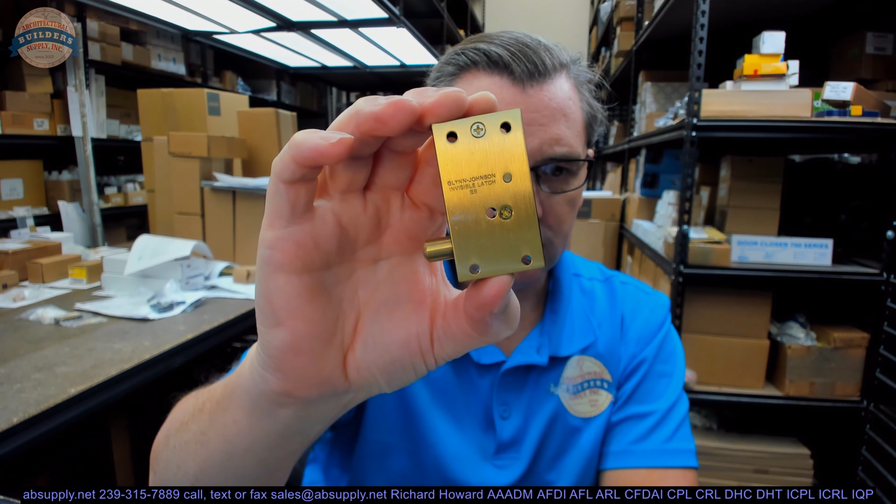This video is to bring you a closer look at the IVES CL12 in a US4, and here it is. So this is what's called a touch latch. The CL12 is the larger of two touch latches that IVES currently manufactures. There's the CL12, which is also known as, you see on there, it says Glynn-Johnson Invisible Latch BB. BB stands for large.

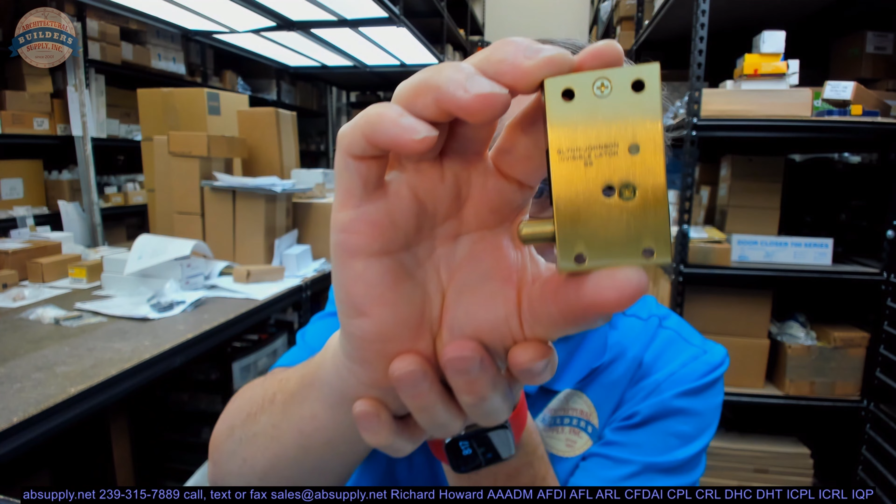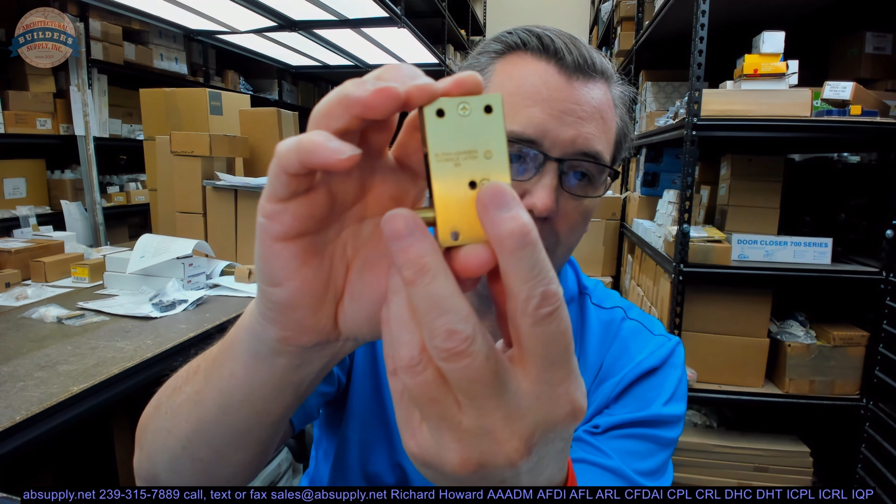Before these were marketed under the IVES name, 30 years ago, they were marketed as the Glynn-Johnson touch latch, and it was the BB large. The CL11 is the other IVES touch latch, CL11, CL12. CL11 is the smaller one. That would say on it Glynn-Johnson Invisible Latch. AA was the small.

Shifting these under the IVES name must just be for marketing. IVES is the accessory manufacturer under the Allegion umbrella, with sister companies Glynn-Johnson, Schlage, LCN, Von Duprin. That's how it's marketed. So this is the CL12. Along with the CL12 and the CL11 is the CL14, which is an auxiliary pusher, which gives you more spring tension when you're dealing with doors that are heavier.

So this latch is going to be used, obviously, when you want to have a moderate-sized door where you have invisible control over it, where you can push on that door and it will latch, and then push on it again and it will release. People have used these on everything from medicine cabinets, even though this is probably a little large for a medicine cabinet, I'd probably use the smaller one, all the way up. I've seen them installed on doors that were 3 foot by 8 foot tall, and remarkably they worked. There's no published weight rating for the door on this item.

I've even recently sold this to someone who was using it in a drawer application. Literally a drawer. They wanted to push on the drawer and have a touch latch govern its operation. And I thought that was an ingenious way to do a drawer. I followed up with the client and I didn't get a response. I was curious to know how well it worked out for them. I imagine that it did.

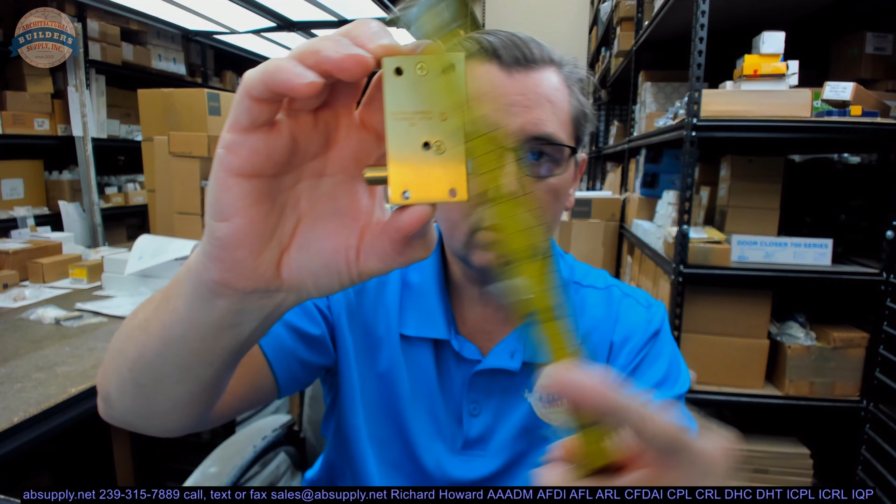Overall height of the body, about 2 1/4. Overall width of the body, about 1 1/4 inches. Thickness of this body is about 9/16. Then it will come with a strike plate. That overall height is 1 3/4 inches by about 11/16. Projection of the strike, not that that matters, but just for scope, looks like it's about 9/16. That's going to be installed, obviously, onto the door itself.

You're going to get fasteners. You're going to get, let's see here now, 4 for the body. Then you'll get 2 shorter ones for the strike. The other thing that's in the package will be this installation template, this piece of stamped wipe coat galvanized steel that you're going to need to use when installing it, and the instructions will show you why. Speaking of the instructions, let's switch to the screen view and take a look at all the supporting information.

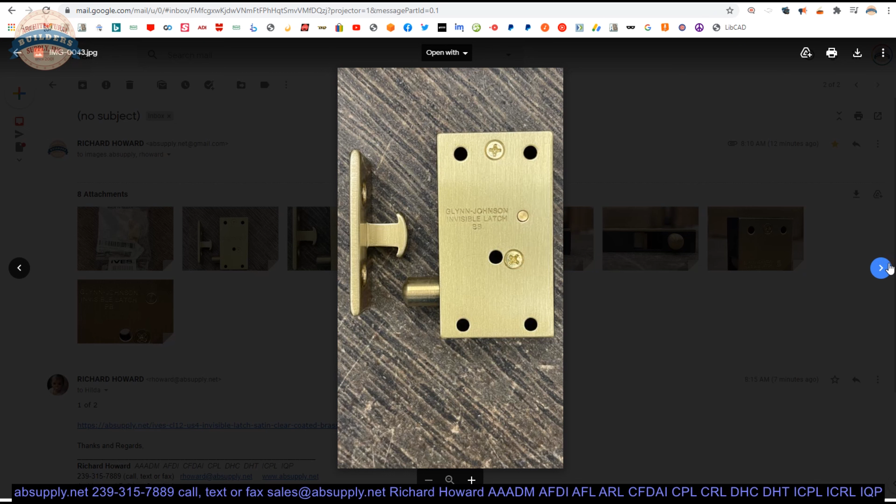Here is the item that we are looking at, and let's take a look at some photographs that we have first. Here they are. That's the packaging. All the contents. The body and the strike. The body. Side view, or an end view, I should say. That's what the door sees. Isometric type view.

A close-up of what's stamped on the faceplate. I've had customers call and give me that information. Then there's also the backside, that's just plastic, the plastic body itself. The strike, cast brass.

Screws, not in an exact US4 finish, but complementary. And then your installation template. Okay, so let's now look at the extended description information. Actually, first, let's look at the other finishes. US10 satin bronze, 26D satin chrome, polished brass US3, US4 satin brass. So I had it right. Those were the 4 finishes.

Now, extended description information. They talk about the fact that it's an invisible latch, dimensional properties. Invisible latch, ideal for installation where no visible latch is desired. Unit can be installed at the top, bottom, or side of the door. Can be mortised into the stop or surface mounted on the stop.

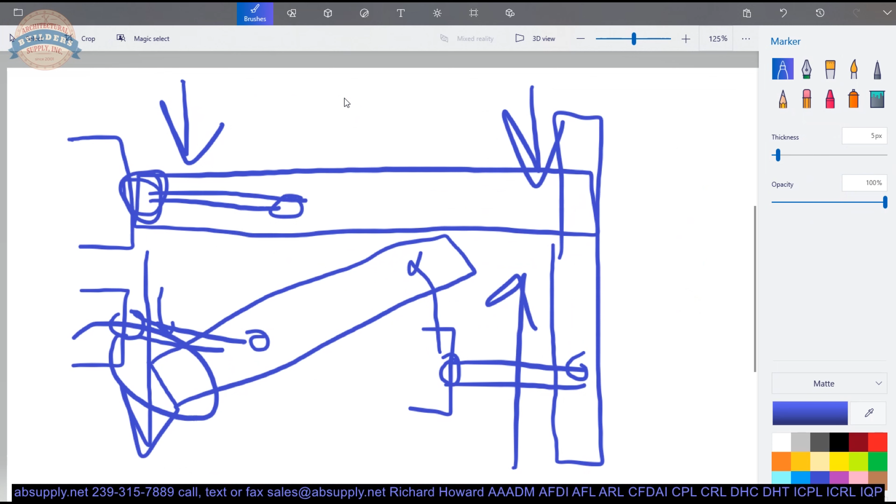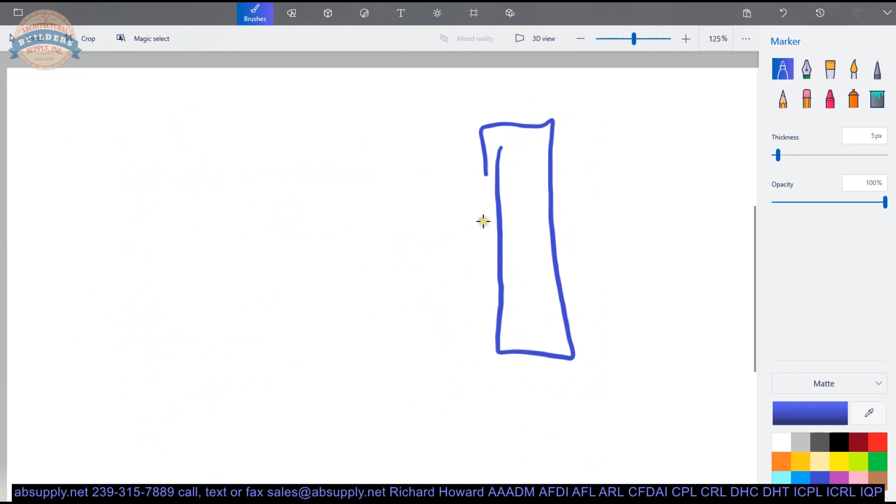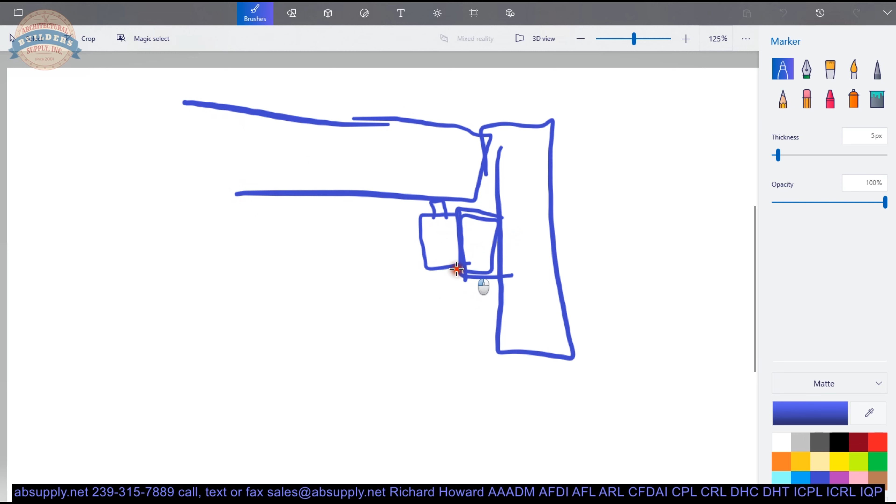That's not an awful idea to... sorry. If you have a frame, you have a stop, and here's your door, you'd be applying that right here. Okay, mortising it would allow you to move that down into this area here, obviously, into your stop. So you might want to consider not having it hang off into the opening any more than necessary.

Recommended for use on larger panels or regular size doors. And like I said, I've seen this installed on 3080 doors. Operation is simple. Latching is accomplished by a slight push. To unlatch the door, a harder push releases the door and pushes the door out. Brass and plastic construction, requires, I would say, 27 pounds to open the door. Brass, satin brass with a clear coat.

Okay, now with the item itself will come installation instructions. The installation instructions that are actually with this unit that I've received, the year is 2020. That's important to know because the instructions that I've received are the Glynn-Johnson instructions from 1999, not the more current 2003 installation instructions. I have them both linked to here, because I find when I review them, I see some different information provided on them.

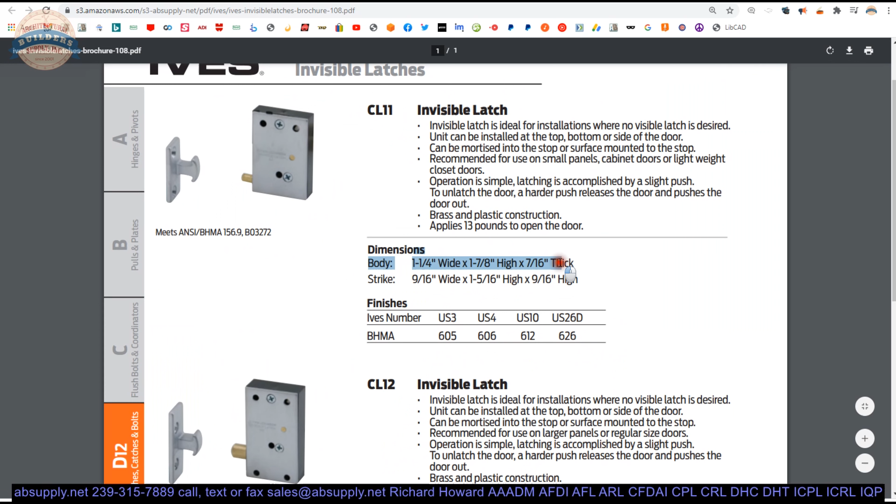First, the product brochure. Let's take a look at the CL12 and its sister products I had mentioned. The smaller version, with its dimensions here, about half of the amount of force required to open the door. The CL12, and then the CL14 is here. Adds an additional 10 pounds of force.

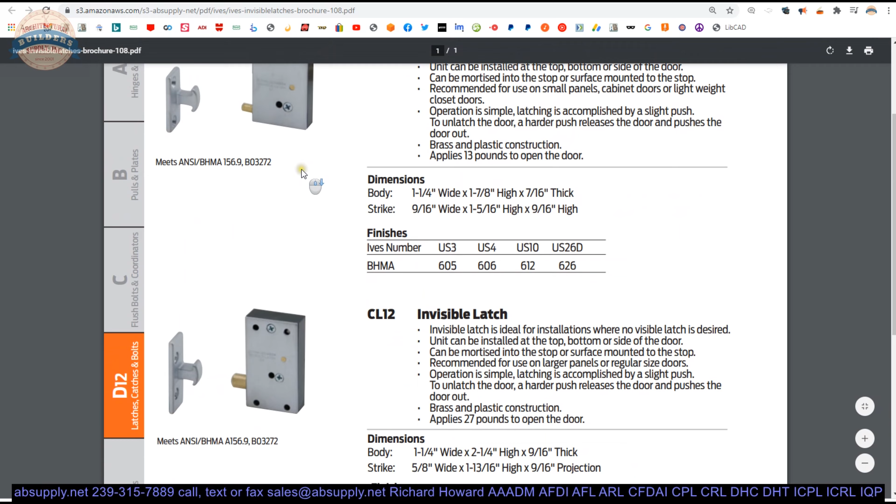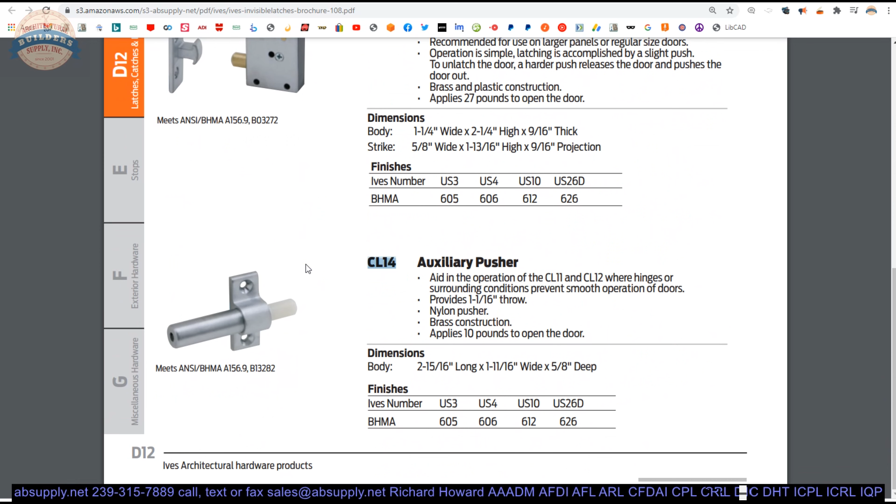And really what you want to have is an adequate amount of pressure against the face of the door so that when you push the door in, the pusher or the spring power inside of the latch itself is adequate to not only allow the door to be pushed away from the latch, but also the internal components to operate correctly. If you are not pushing in and then the latch pushing you back out, the internal components won't articulate the way that they're supposed to work in order to free the latch.

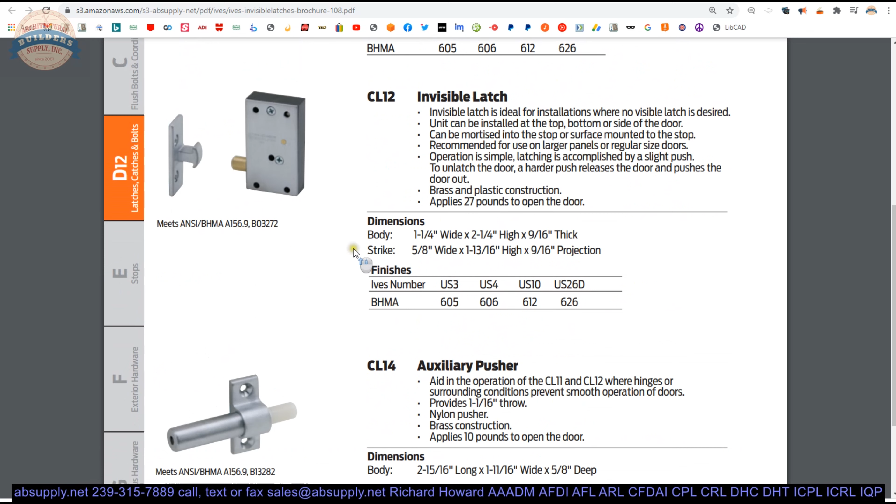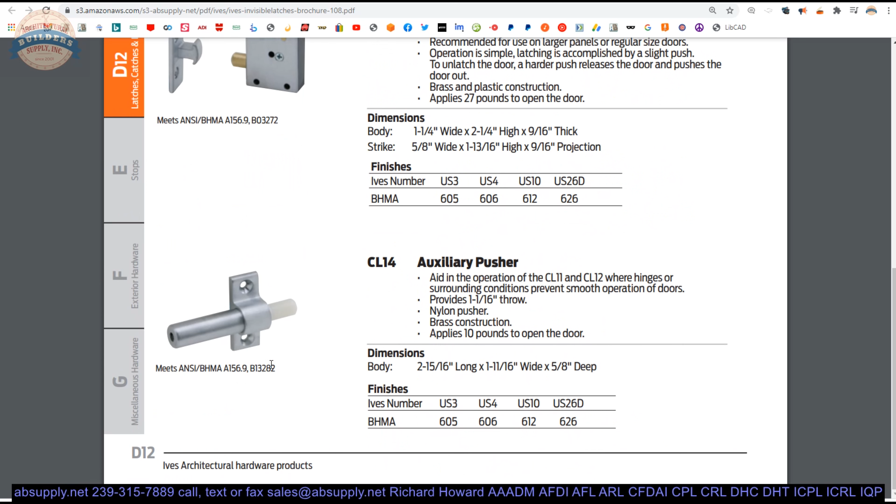There's a catch in here that opens up in order to allow that portion of the strike to exit the body. So you might find that you have sloppy or inconsistent or poor operation, especially when you are working with heavier doors. That would be an indication to add the additional pushing outward, because you can't control how much force is coming back at you. You can only control how hard you're pushing away from you, and you need to have that pressure pushing away from you.

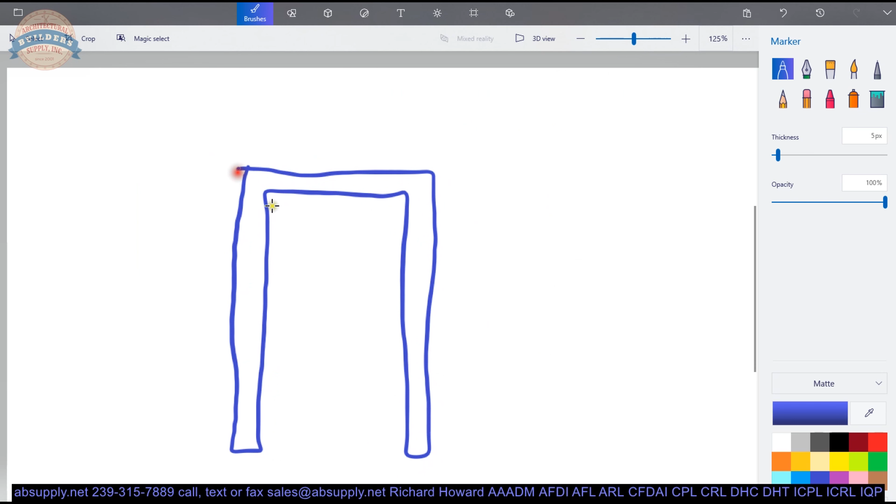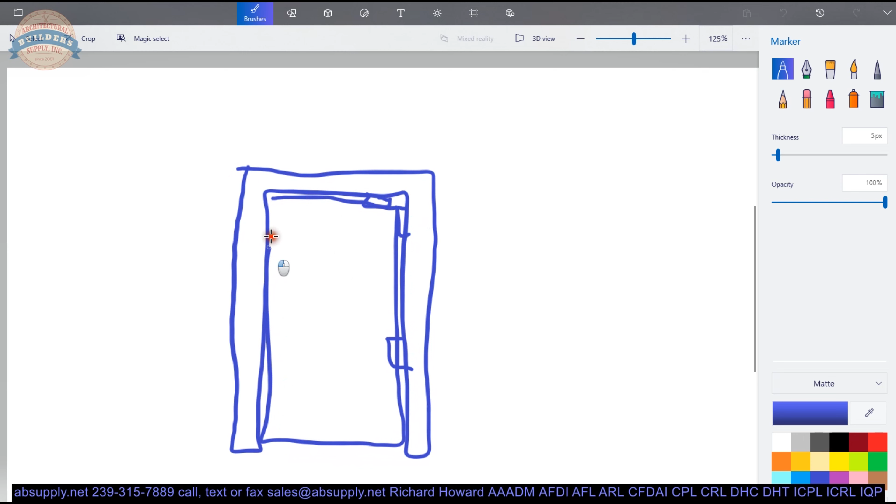The other time that I find people have trouble is when they have an extremely tall door, like that 3080 door that I had mentioned. It wasn't mounted here or here. It was mounted right where you were pushing. If you take your 3080 door and you install that up in this area and you're pushing here, I would expect that you're going to have trouble with this because of the amount of flex in the door. You're pushing here, okay? That's going to move.

I would say that entire door is going to actually move like that a little bit, in a very exaggerated sense. You're pushing here, but that may not affect the same rate of movement up at the top of the door. So if you move this a 1/16 of an inch, this may not move exactly the same amount, and it might render the operation of the latch a little sloppy.

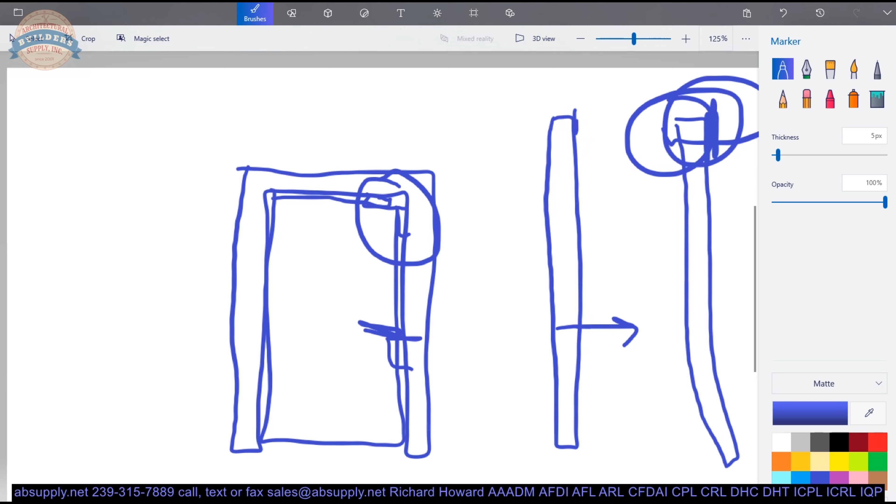So if you were going to be installing it in that type of area, you might need to consider strategically placing an auxiliary pusher, you know, to compensate. Experimentation is the key word there.

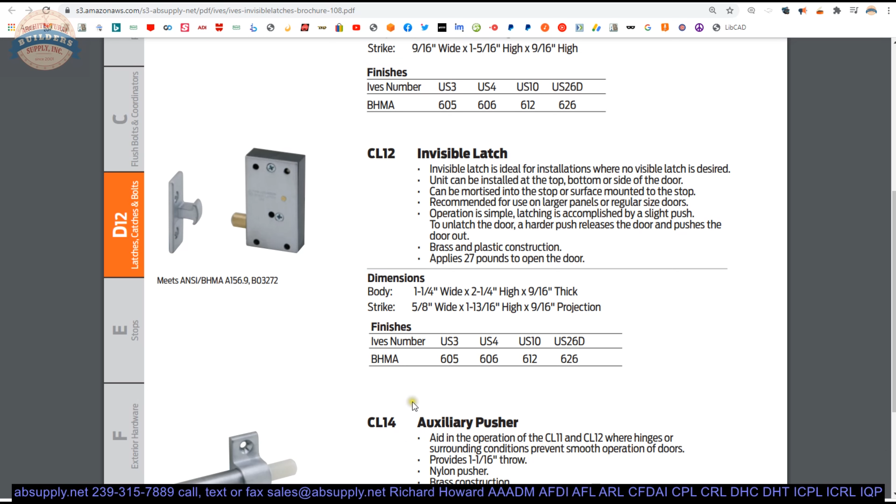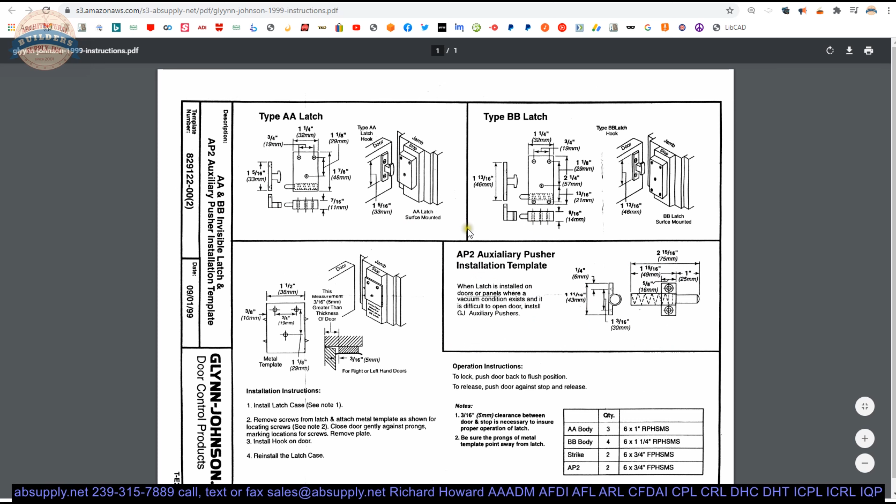Now, those installation instructions, let's look at the ones that come with the unit first, and we'll just go over them. When we take this document, we can immediately ignore the AA portion. We can ignore what Glynn-Johnson used to call the AP2, which we now call the CL14. Ignore that. So we've ignored a third of the page immediately. Then they show the dimensional properties here of the BB latch, or what we know as the CL12.

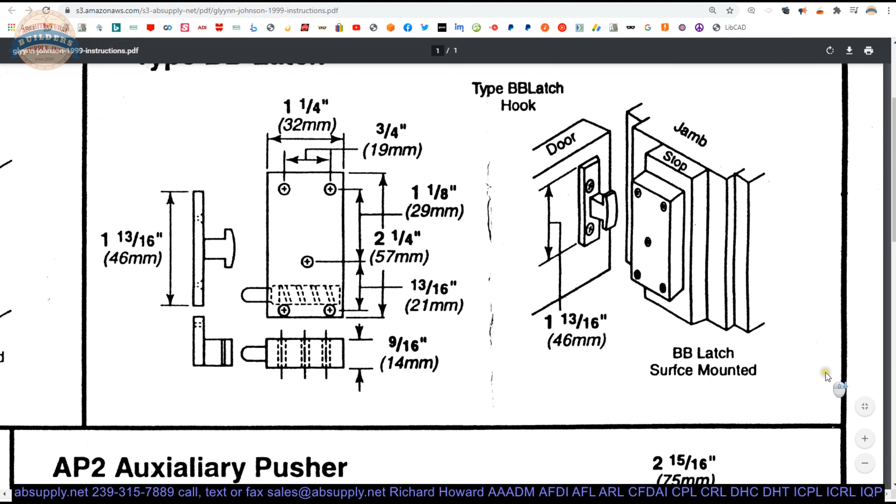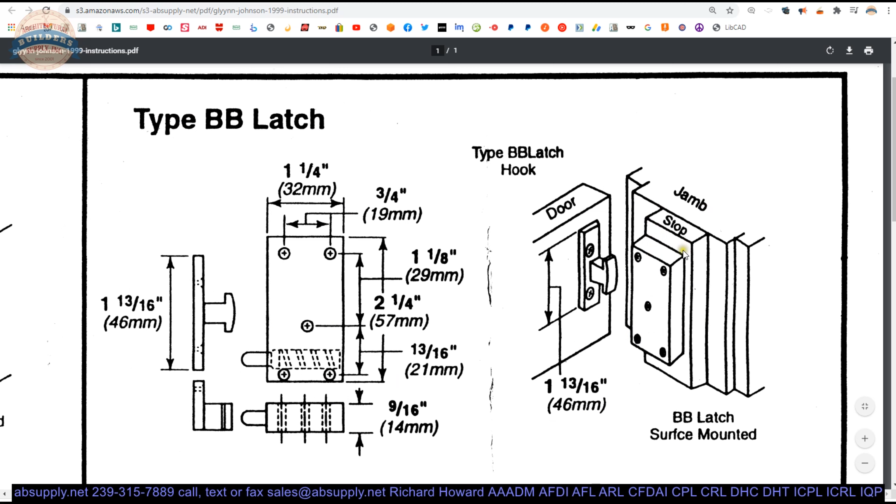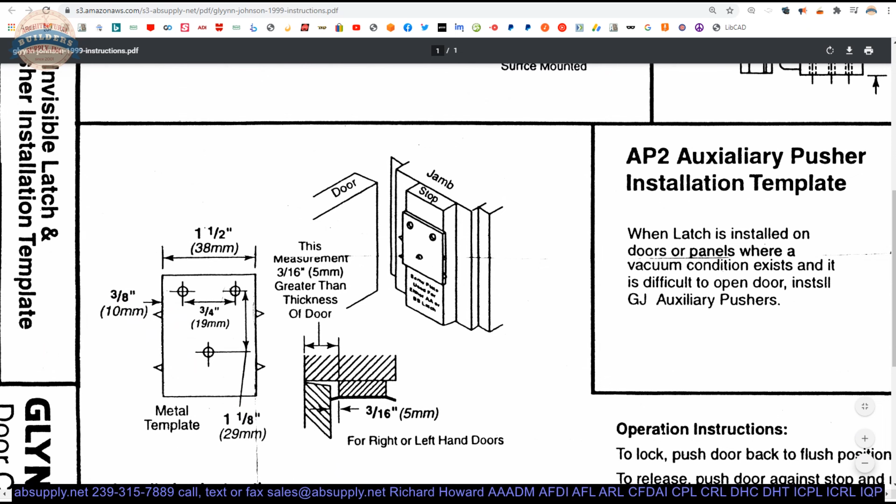Okay, dimensional properties, hole locations of the holes, that's all really nice to know. They show you the latch when it's surface mounted. So that gives you an idea of what it's supposed to look like. Imagine if you mortised that, okay, just move it over in your mind's eye along with the strike. And the important part really is down here. This is where the installation instructions really start.

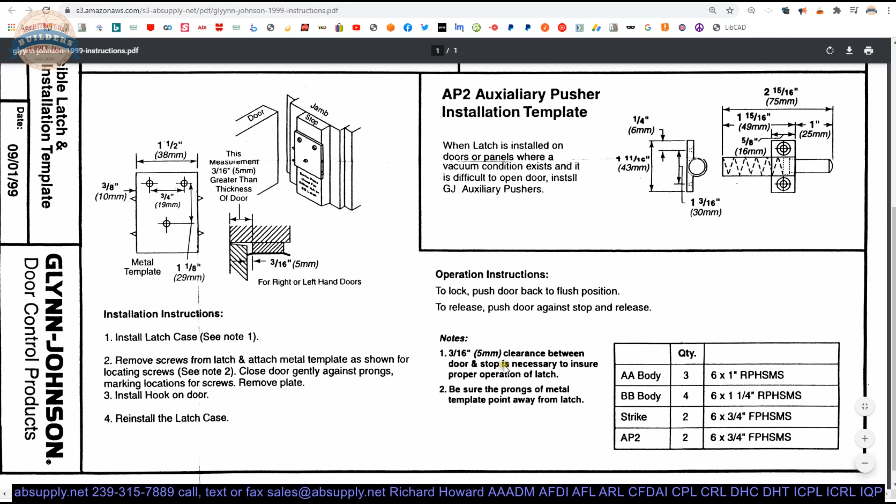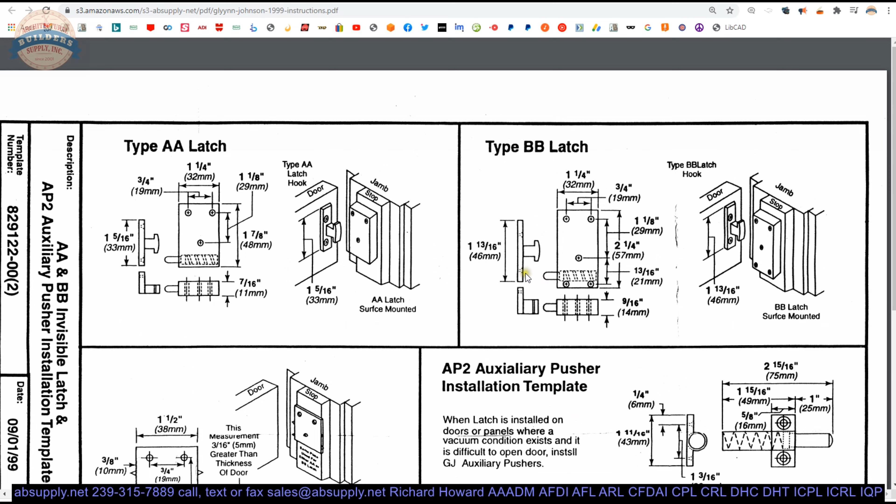So the installation instructions tell us, install the latch case. See Note 1. Note 1, 3/16 clearance between door and stop is necessary to ensure proper operation of latch. So what they're saying here is this. The way that this is drawn, you've got the door. Imagine, remove from this in your mind's eye the metal template. They're saying here, you must have natively, before you even start, 3/16 of an inch from the face of the door to the face of the stop.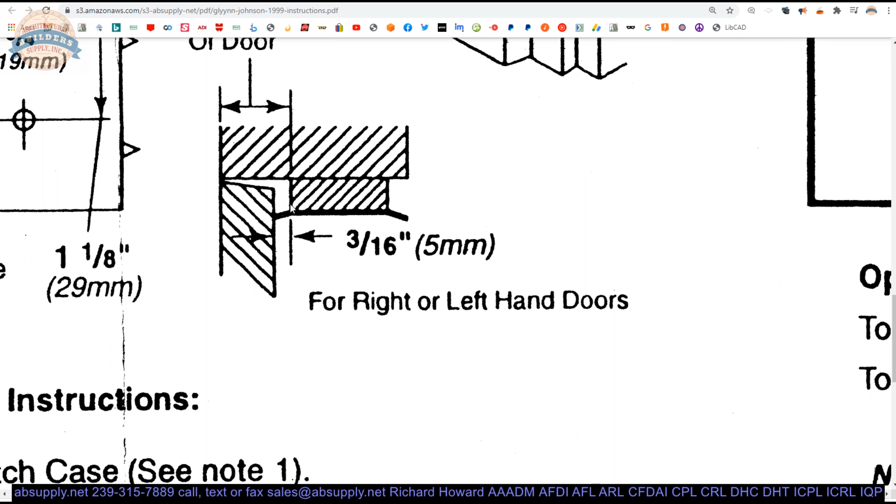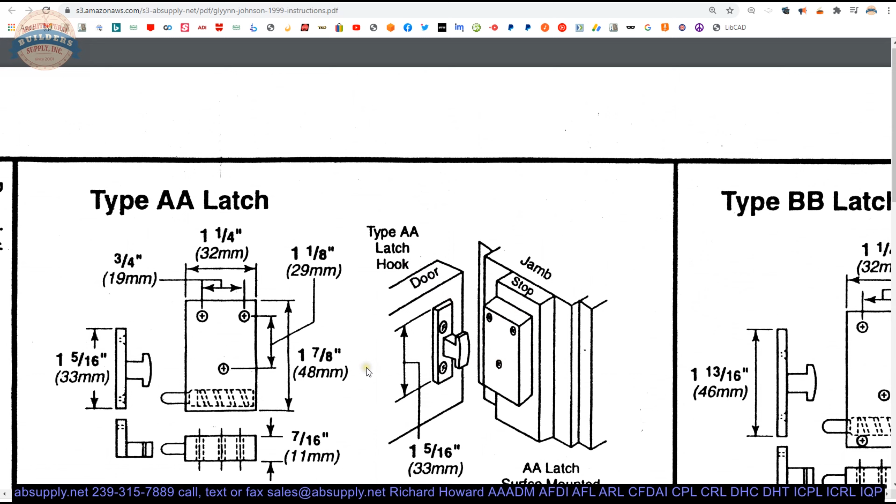Okay? If your latch is set back from the face of the stop, well, that won't do you any good if you don't have 3/16 of an inch. Why? Because you need 3/16 of an inch movement to get the internal mechanism in the latch assembly itself to actually articulate and to latch and then unlatch the strike out of the lock body. I've had people call and say, yeah, I pushed the door closed and now I can't push it in far enough to get it to unlatch.

And the obvious first question is, are you sure there was 3/16 of an inch margin from the face of the stop, or whatever would limit the door, to the inside face of the door? And they said, no, I think it's about 1/8 of an inch or less. And that's the problem. The next question is, what do I do to get it open? Pull hard is the answer.

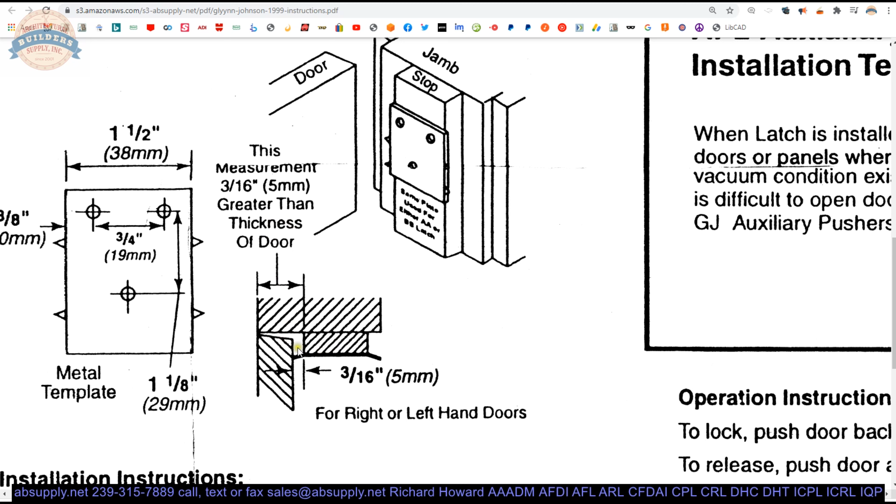Luckily, the last time I had that call, the client was able to actually get over the ceiling line into that opening in order to unscrew the latch. But I've had other people call and say, yeah, I'm going to have to break this off the door. So if you don't have 3/16, you're going to have trouble with that. So that's step 1, referring to Note 1.

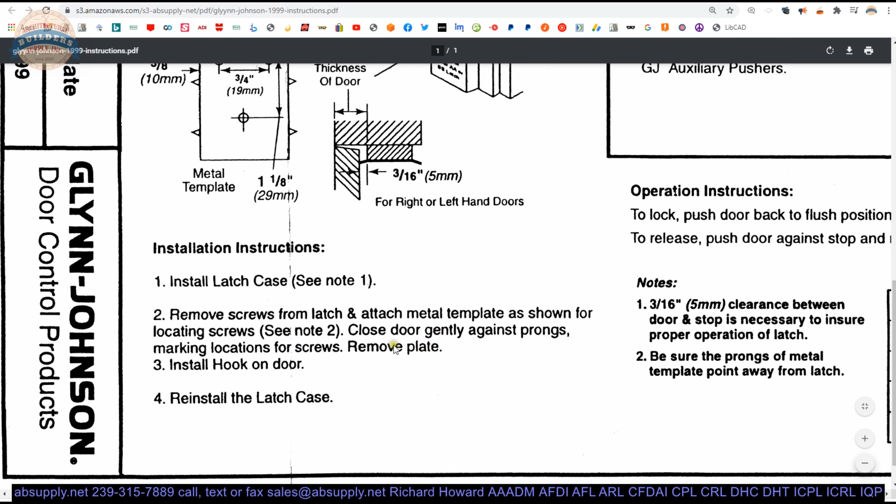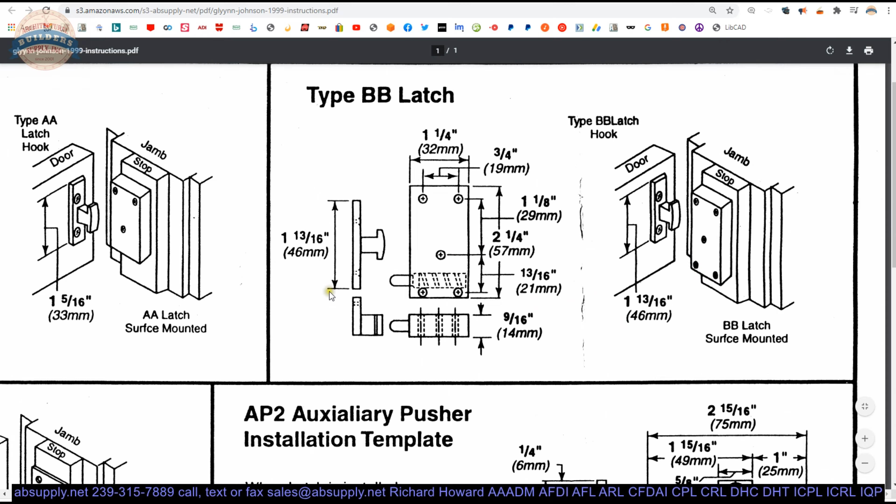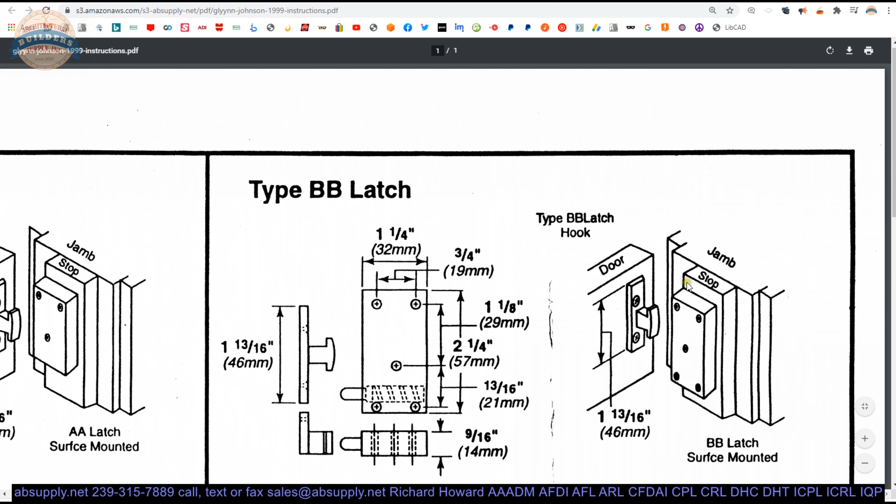Step 2, remove screws from a latch and attach metal template as shown for locating screws. Close door gently against the prongs, marking locations for screws. Remove plate. Okay, so what they're talking about here is, it's somewhat inferred that you are lining the latch body up with the face of the stop, and that's inferred here as well by this isometric drawing.

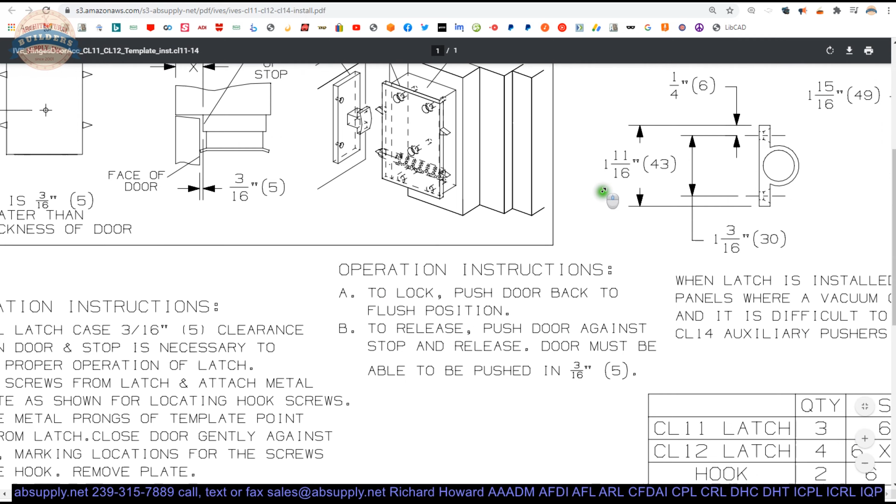Okay, now let's take a look at the IVES version of all of this. They certainly infer that here as well. And they're showing the metal template, but what they're saying here is that it appears as if you're attaching it to the top side of the installed body itself.

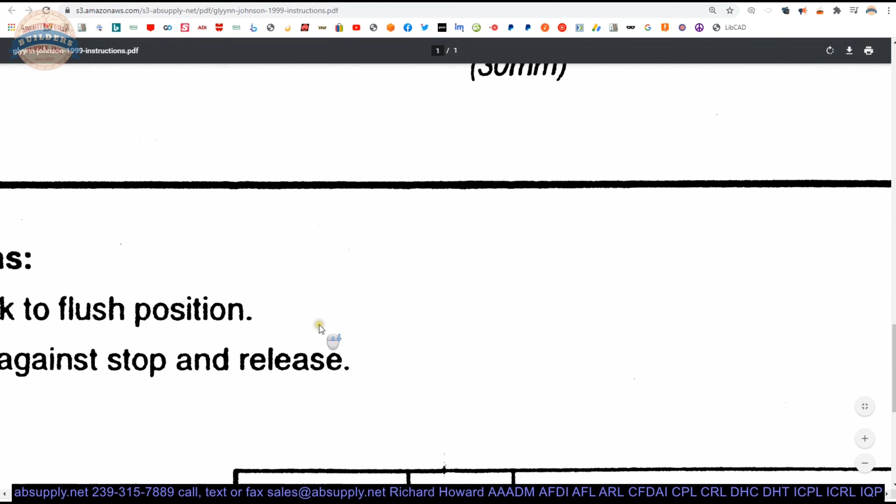Whereas in the Glynn-Johnson version, they're clearly telling us install latch case. So they want you to physically install the latch case onto where it's going. Remove the screws from the latch and then attach the metal template as shown. So, to me they're showing us to remove the lock body to attach the metal template. The IVES version shows it installed on top of it.

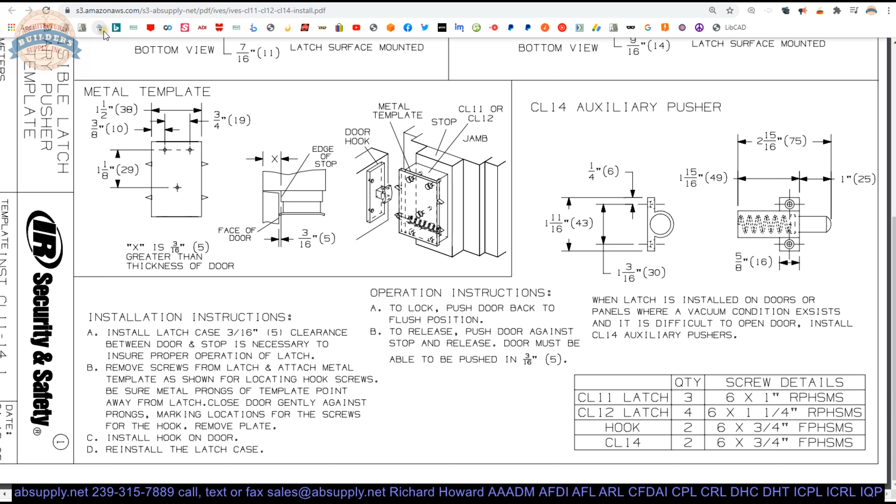So, what to do? Well, the only thing that this metal template is doing is allowing us to accurately locate the holes where you're going to drill for the strike. Okay, so it's going to be a matter of simply looking at the piece of hardware and then determining what is the correct way to do that. So let's switch to the camera view now, and let's take a look at that.

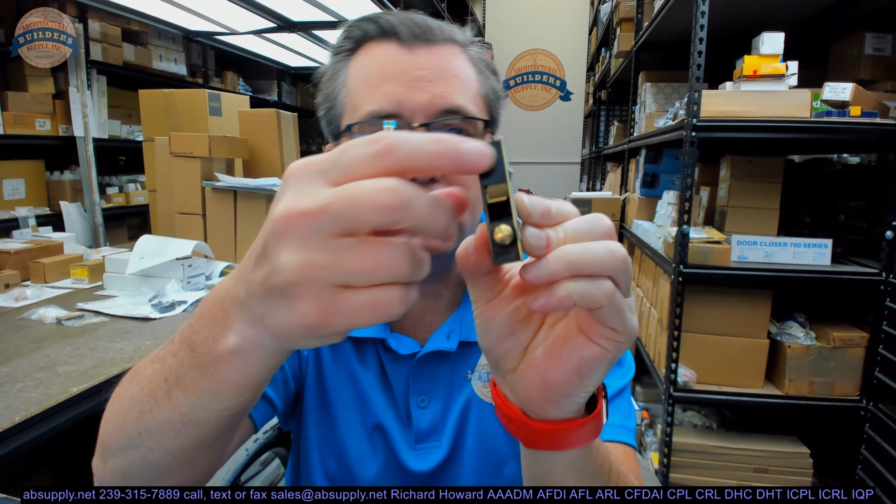Okay, so here's our hardware. So what the role of the template is to do, and it does say the prongs are to face away from the unit. You get that installed there, and then these prongs, which are pointing away, they just simply need to line up with where these screw holes would need to show for the latch. And this would be the way in which it would need to be shown.

And when we get that lock body, I'm going to flip this around. When we get the lock body, the metal template, and the strike all in relationship to each other, it does give you the impression that that's going to mark it in the correct location. Okay. Now, if I pull the lock body off and just put that onto the stop, there's really no way that that's going to actually work, in my opinion, because the strike's going to be out of position.

I mean, if this is attached to the face of the stop, that part of the strike is going to be hitting the face of the stop. So the reason that we have both of them there is because I think the Glynn-Johnson installation instructions aren't calling it out correctly. Well, unless you're installing the strike in the opposite orientation, meaning rather than installing it this way, you're installing it this way. That might be okay. But even still, you'll have the heads of the screws to contend with. So I'm still gonna say that that's not even remotely accurate.

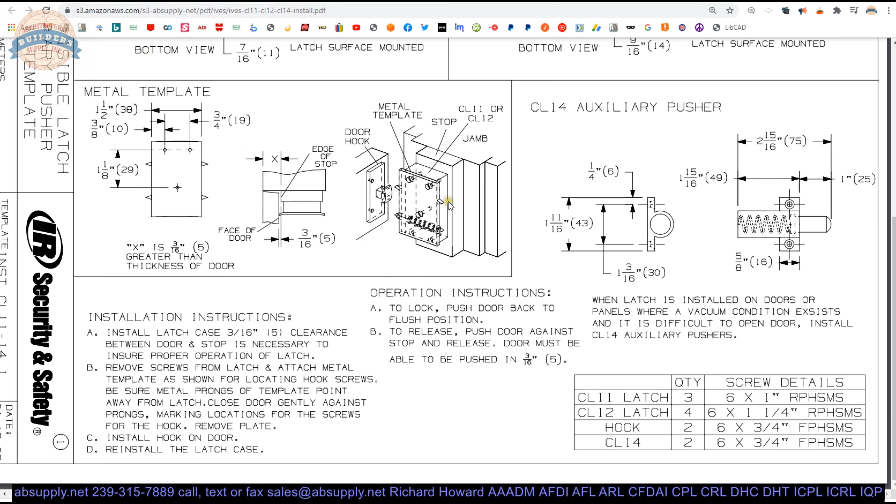Okay, so we're gonna stick with this being the accurate way to show this on the IVES version. They're also inferring here that the latch body is not flush with the face of the stop. And frankly, no dimension is given.

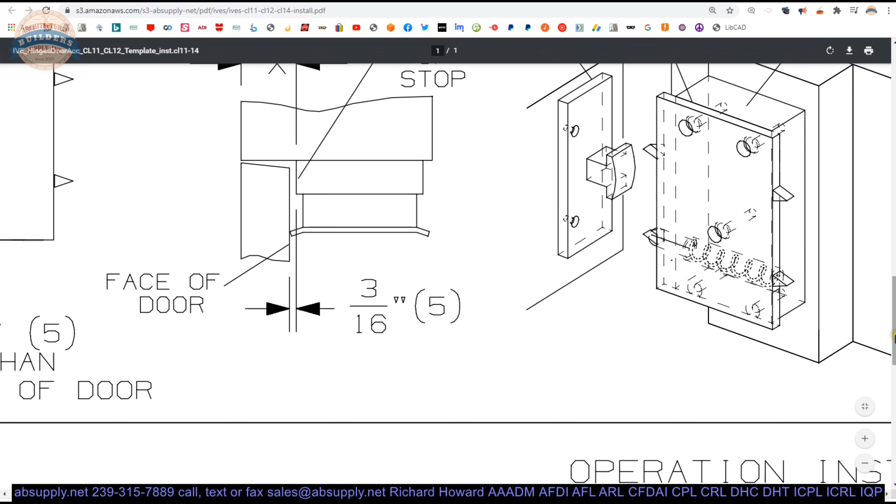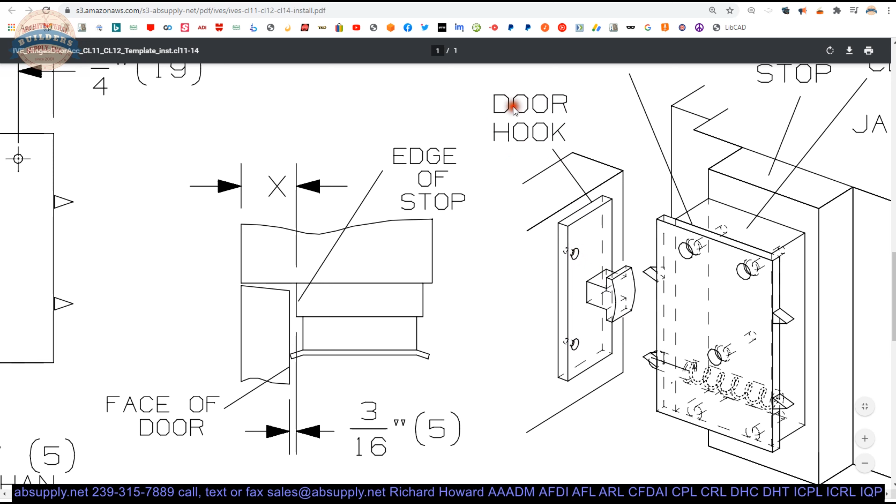So in the absence of this dimension, provided you have 3/16 of an inch clearance here, you're simply going to stick with flushing that to the face of the stop. When you put the metal template over the body and put a couple of screws into it, you'll then push the door against that metal template and it will mark the locations for what they call the door hook. Okay, pretty simple and straightforward. Let's go back to the Glynn-Johnson version.

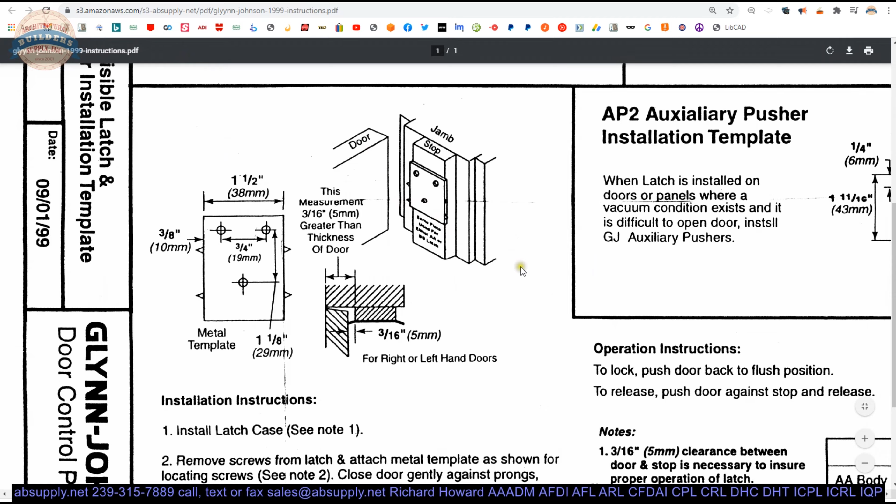Yeah, they even say reinstall the latch case. So they make it seem as if you're removing it, but I just don't see how that's going to work. It strikes me as unusual that they would package it with these installation instructions and not the more current ones. So reviewing both, I think, is necessary. Okay, back to the IVES. Let's just hop over here now and start from the beginning.

Installation instructions. Install latch case. 3/16 clearance between door and stop is necessary. So install the latch case. Clearance between door and stop is necessary to ensure proper operation of latch, which is 3/16 of an inch. Okay, step B, remove screws from latch and attach metal template as shown for locating hook screws. Be sure metal prongs of template point away from the latch.

Close door gently against prongs, marking locations for the screws for the hook. Remove the plate, install the hook on door, reinstall the latch case. So that's all simple and straightforward. To lock, push the door back to flush position. To release, push door against stop and release. Door must be able to be pushed in 3/16.

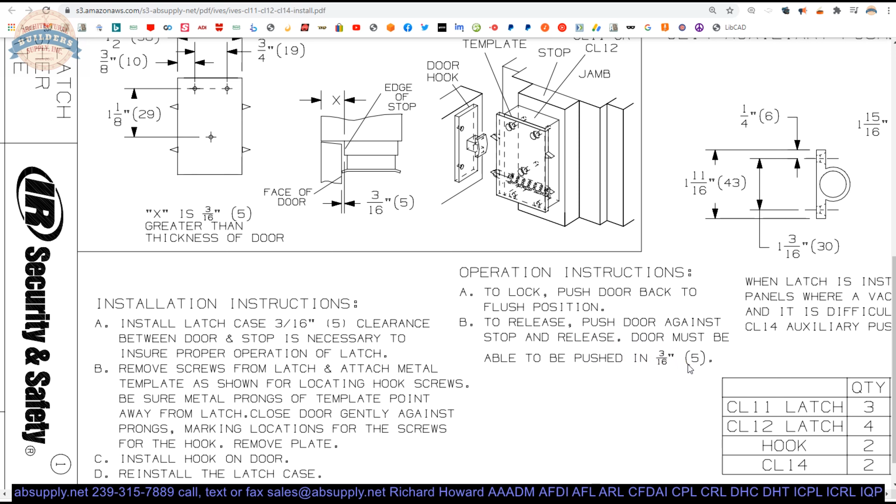It would be nice if they perhaps added, if this dimension is not observed, a lockout will occur. That might, to put it in stark terms, save some people.

From assuming 3/16 is a suggestion, it's not a suggestion. Okay, I think that wraps up the installation instructions. Where to install it: I would install it, if you're doing a larger door, in the area of where you're pushing against the door.